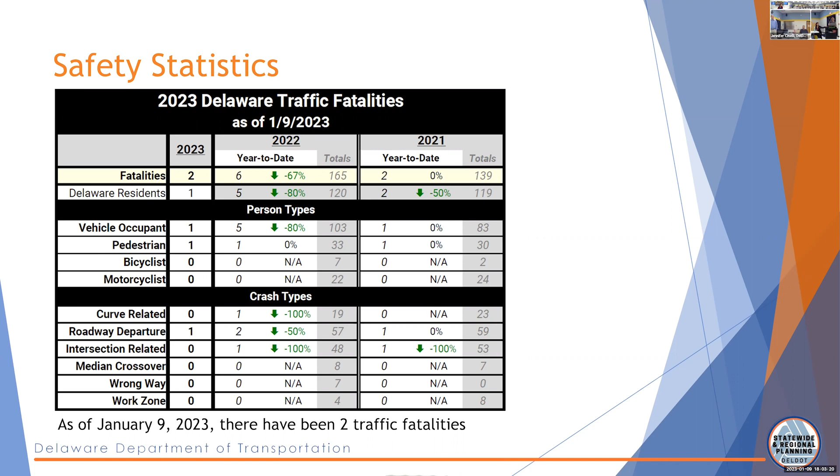I'm going to hand it over. Excellent. Not always the funnest way to start a meeting talking about that, but that's how important it is for us to get that message across. And again, this meeting is a virtual meeting. We are on Zoom, so there are other people listening and not just you all, and we hope to spread that message, not just to you, but to everyone. So thanks for hearing that.

As always, these meetings are designed for the corridor committee members. They are open to the public. We welcome the public to come, whether virtually or in person. However, questions and discussion will be with the committee members. We will have public comment. And I am going to go through the agenda right now because we are doing our public comment a little differently tonight. So you'll see we're going to do our introductions and meeting overview.

We're going to have 2 different presentations. All presentations are important, but these really are going to build into the small group breakout sessions that we're going to do tonight. So at some point, half of you are going to go to one side, half the other. We're going to have a little bit more of a small group discussion. And everything that Steve and Leah talk about in terms of first the existing conditions, and then as we transition to our safety and capacity improvements toolbox, we hope that you'll bring that over to the discussions and provide some good input.

When we decided on the composition of our corridor committee, certainly it was because each of you represents a different group, a different business or institution or advocacy, but it's also because each of you as an individual we thought would be good at contributing.

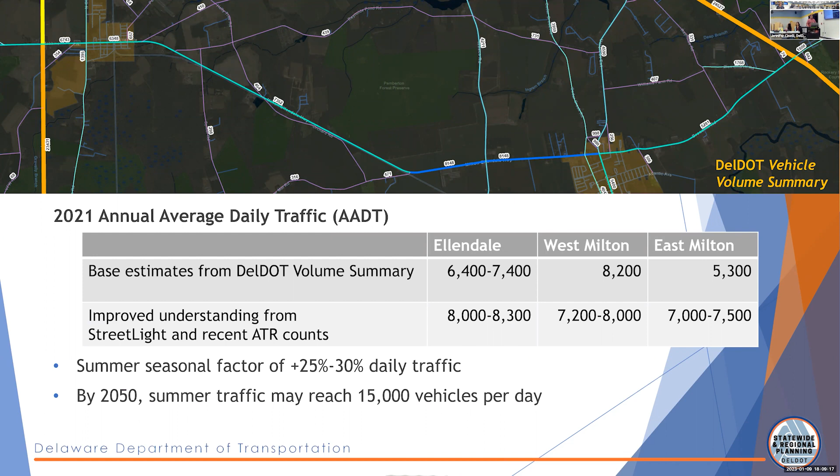So we talked a lot last time about the corridor being sort of a beach route, and that certainly holds up with a little more in-depth analysis. And just to give a perspective, we may be talking about 15,000 vehicles per day by 2050 as this continues to grow. A little bit digging into some of this StreetLight origin-destination data that we think is pretty cool.

Looking at from an origin west of 113 and how the traffic behaves along 16. From west of 113, we're seeing about 60% of through traffic. 60% of the cars tracked go all the way through to SR1. So that sort of confirms 16 as a true through route. These cars are destined to the beach and back, going the other way.

It holds true on the other side of 113. We're not seeing a lot of drop in the track volume, which would imply destinations and stops in Ellendale or even Milton. Some of the volume does leave 16 and head south on Route 30 and Route 5, typically via Route 30, and we see some traffic peel off at Mulberry Street using Cave Neck Road. So some traffic does leave 16 and head to points around Route 9 and all the way down to the Long Neck area.

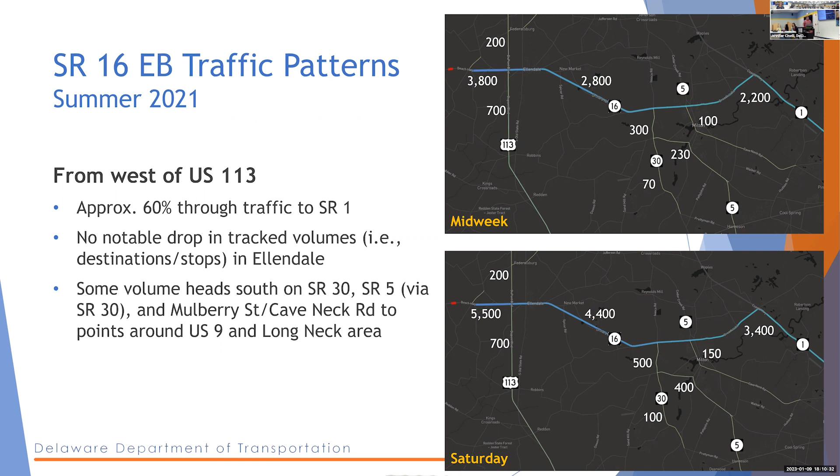Similar from east of Ellendale, and you can see we're tracking more traffic. There's a lot more traffic both midweek and Saturday, and it's critical that Saturday is higher, further supporting the beach route that we're talking about. Still 60% is the number we're seeing as through traffic. The first significant traffic split is at Route 30, where we lose about 17% of the track volume. The most common route from there is actually 30 down to Sand Hill Road and then over SR5. From there, they head to the Route 9 area, or some are tracked all the way to Long Neck.

So a small percentage of traffic is stopping in Milton, whether that's downtown or points along Route 16; they keep continuing, whether that's Long Neck, 9, or Route 1. And again, the reverse is true. We're thinking of a west to east progression, but the percentages and overall numbers are pretty similar looking westbound as well.

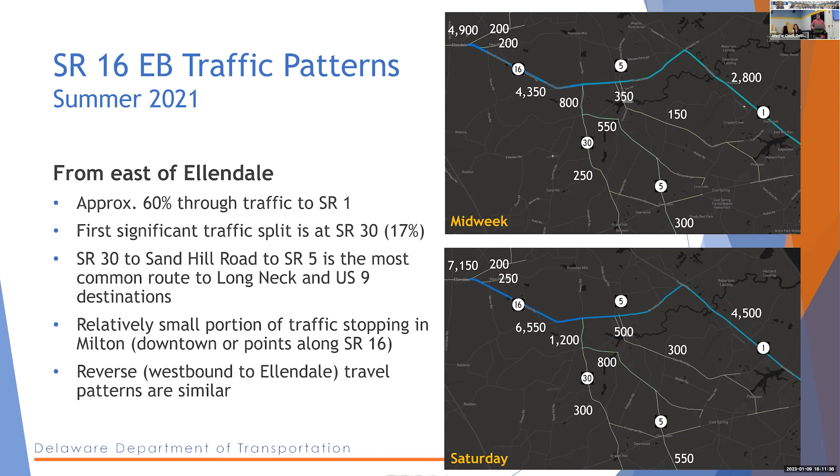Since we did identify Route 30 as a breakpoint and a turnoff point for the traffic that does leave 16, we looked into that a little bit too. On a weekday, you can see it's the best way to move north-south through our study area between Route 1 and Route 113. From the reference point just south of 16, we're seeing cars use 16. Obviously, plenty of cars head up on Route 30 towards Milford. A few head east, and then southbound it splits fairly evenly: 30 south of Route 9 and 5 south of Route 9 both have a pretty significant number of cars tracked from the Milton area.

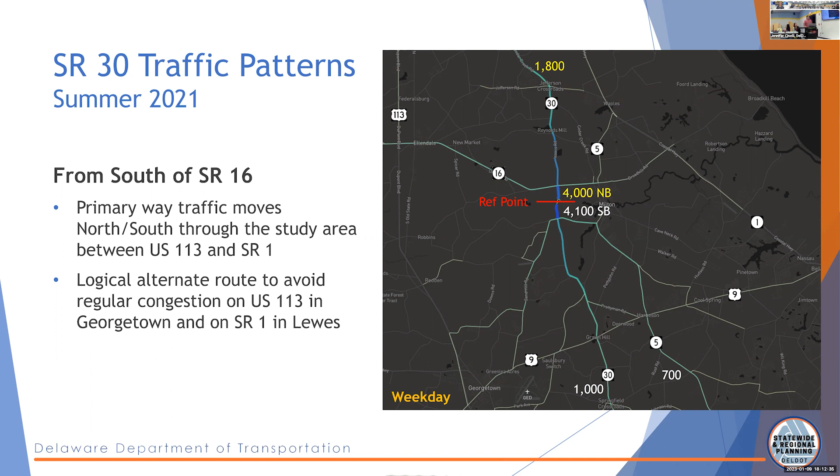So that's a logical alternate route to avoid the regular congestion we see on 113 in Georgetown and Route 1 in Lewes. The difference on Saturday is pretty stark. You have a lot more traffic on 30 on a summer Saturday, especially southbound. We're tracking 7,000 vehicles, which is almost double what we were tracking on a weekday, and just under half of that stays on 30 south of 9, which is really the cut through route all the way down to Millsboro. So it confirms that 30 is now a tertiary beach route, especially on weekends. You have Route 1, you have 113.

And I kind of wish IG Burton was here from when he was councilman. He and I talked endlessly about Route 30 being the new north-south highway through Sussex County, especially with the Bay Health campus. Looking at these numbers, the 4,000, I thought, oh, the Bay Health campus now has AI DuPont on there, that's what the traffic is. But if you look at how much it increases on the weekend, that campus isn't really open. So it's definitely visitors to the area. This is summer traffic we're looking at. It's the worst case, but it shows the growth and patterns pretty clearly.

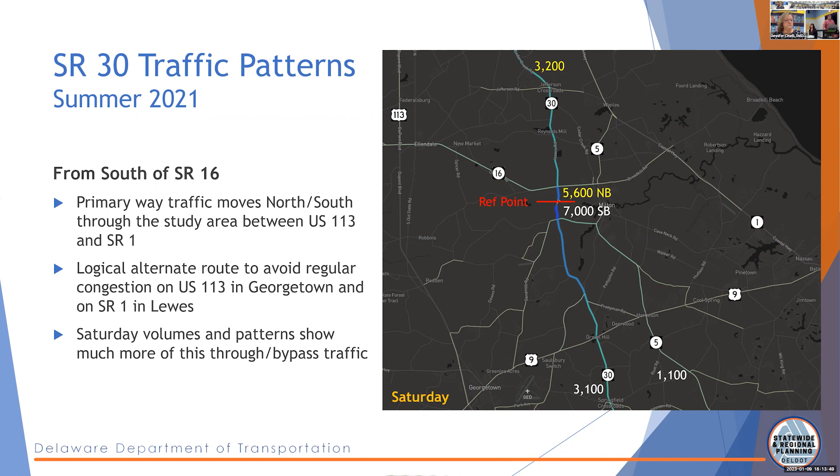All right, so just to summarize quickly, we definitely consider Route 16 one of the northern beach routes, with the typical associated characteristics: high through traffic, higher weekend than weekday volumes, higher summer volumes than off-season volumes, and low local OD traffic in Ellendale and Milton. We learned that the volumes are slightly higher on the west side of the study area, but they're pretty consistent overall. But Ellendale does see that first rush of traffic along 16.

So with the volume we're at, we may be talking about some of these high volume side street intersections that may start needing improvements for safety or operational issues that may be starting to arise or may already be there.

Of the traffic that does not stay on 16, a common route is 30 to Sand Hill Road to SR5 - to points south. We're not seeing that traffic go all the way to Route 1 as a bypass to avoid 16. 16 still moves pretty well and carries a lot of through traffic, but these roads are a common way to get to points in that area. So that's good to know.

And 30 is typically a day-to-day balanced north-south distributor. You can see it's split traffic, a lot of local traffic on Route 30. But in the peak times, like summer Saturdays, we do see a lot more regional throughput.

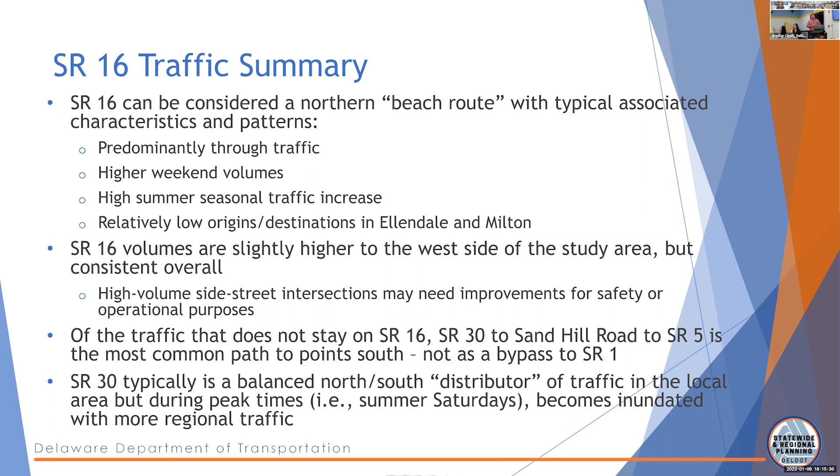So now Leah's gonna talk a little bit, help me out. Thanks, Steve. Yeah, so obviously Steve gave us a really good overview of what's happening now. He did mention, maybe by 2050, we'll see things grow up to an even higher threshold of 15,000 cars a day during summer peak.

So one other thing we want to look at is what's coming, right? There are other developments and DELDOT projects coming along the 16 corridor right now. So we're going to walk you through from west to east what's in the pipeline right now. As we break into small groups, we'll have staff who can fill in more details. You may have questions about some of these projects - I know I do, everyone else in the room probably does too - but I'd encourage you to make note of those. When we break out into small groups, we'll have folks from the county, from state planning, and Steve can speak to some of the DELDOT capital projects.

So starting right at the intersection of 113, I'm sure some of you are aware there is what's called a grade separated intersection coming in at that intersection. It's still in preliminary engineering - DELDOT has not started design on it yet. So this is actually a good opportunity to weigh in on that, because any feedback you provide will go to the DELDOT project engineers. Basically, 113 will go over and 16 will come underneath the roadway.

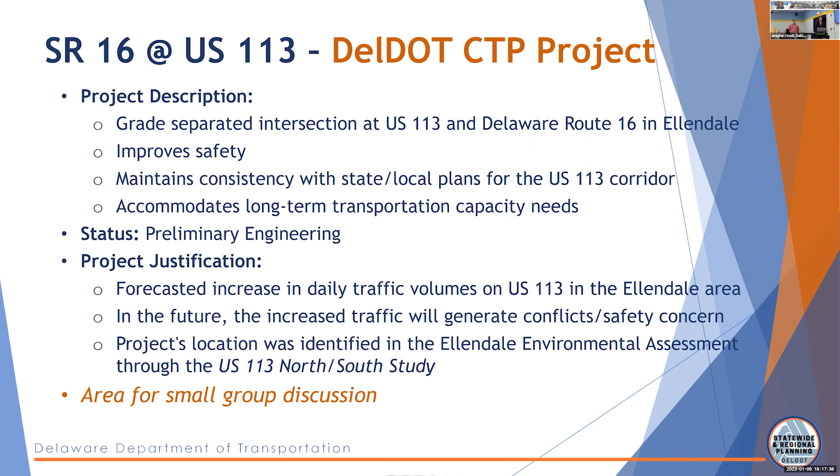Also, we have some development proposals right for that intersection. One, right at the northwest corner, is called the Enclave at Starwood. That project has been submitted to the state and has gone through the PLUS process. Dorothy in the back knows more about that than we could ever ask to know. That development is proposed in what the state calls Level 4, and Level 4 is where the state really only wants to see agricultural or conserved land. It's not a place where the state wants to fund infrastructure investment. So they're in conversations - the developers are in conversations with the state, which is going to provide feedback - but really, per state planning, that's an area where we more want to see those lands conserved without development.

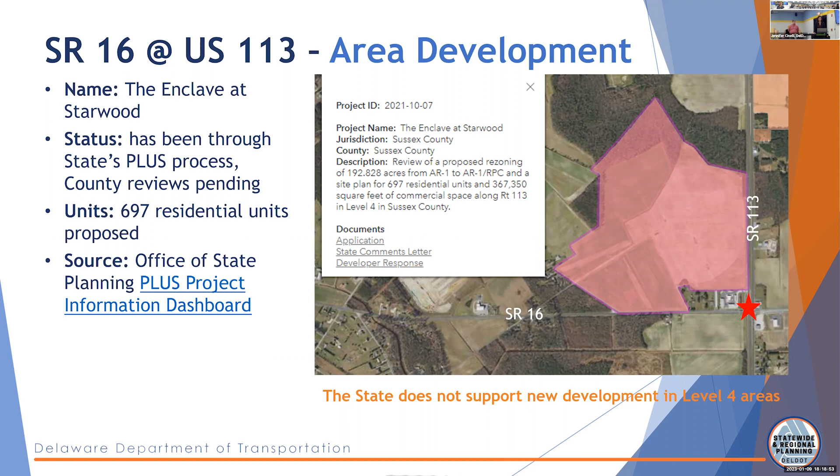But you know, oftentimes developers see that a big grade separated intersection is coming in, and maybe that's an opportunity. So they are seeking annexation into the town of Ellendale, which hopefully will happen within the first six months of the year. Very interesting news, and that is underway - someone else in the room can speak to a more updated situation. So as we continue into the town of Ellendale, we also have a proposed development to the southeast corner.

That is called Newdale Acres. That's another 296 residential units being proposed, and that one is a little bit further along in the process. That subdivision has been approved; they just have not started construction yet. So that one's coming.

Another update: that one has been annexed to Ellendale, and they have started construction in there, so they're going to start construction elsewhere for the next few years. So construction coming soon, and it has been annexed into the town. Thank you for that update. So that's another big impact in that direct area and vicinity.

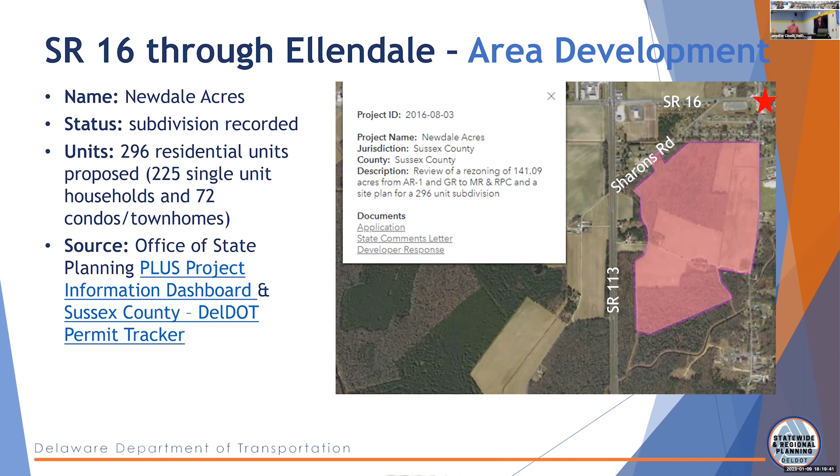Of course, we care about this because this is going to mean more cars on 16, as well as on surrounding roadways.

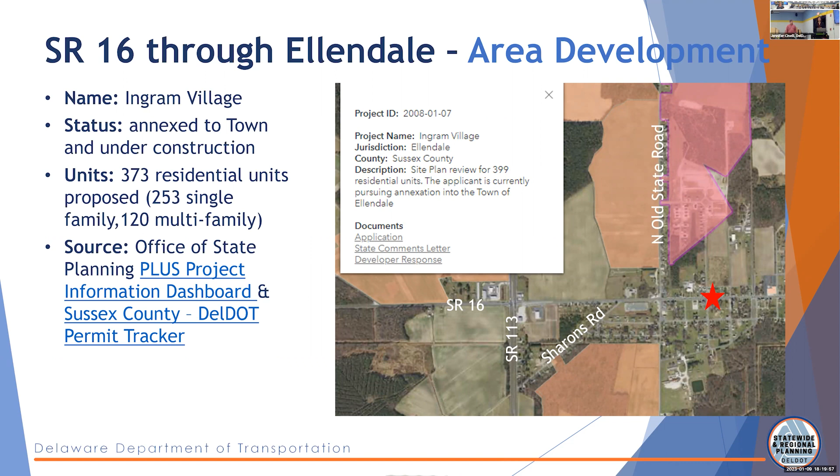Going north of 16, Ingram Village - we know this one has been annexed to the town and is already under construction, so many of you are probably familiar with the new homes going in back there. Total of 373 residential units. And then lastly, right in the vicinity is Garey Farm, which is on the west side of North Old State Road.

That also has been through the process. Do you have any updates on that? They'll be on the same timeline as the Enclave at Starwood - the same timeline as the bigger development to the west. And that's another 491 units.

So I think you all are seeing why we're here tonight - there's a lot of development coming, and we definitely need to start preparing for that growth.

And just to put a punctuation mark on this with Ellendale, what was your census number? So our census number was around 500, and there's actually two developments that aren't going to show up here, but that touch the two developments that are shown. And if everything gets annexed in like it's supposed to, yada yada yada, 5,500.

Right, 5,500 homes, correct? Units. So yeah, it's an interesting mix - it's probably 2,500 to 3,000 houses and 300,000 square feet. But that's almost quadruple the population of Ellendale over the course of maybe 4 or 5 years.

And what we can do for you all - we can touch base and get the information on those other developments you mentioned, and we'll distribute a revised version of this presentation that builds in the information we're hearing tonight, so everyone has it. I just wanted to make sure everybody was clear on what their census number was for 2020 and what it will be in 10 years.

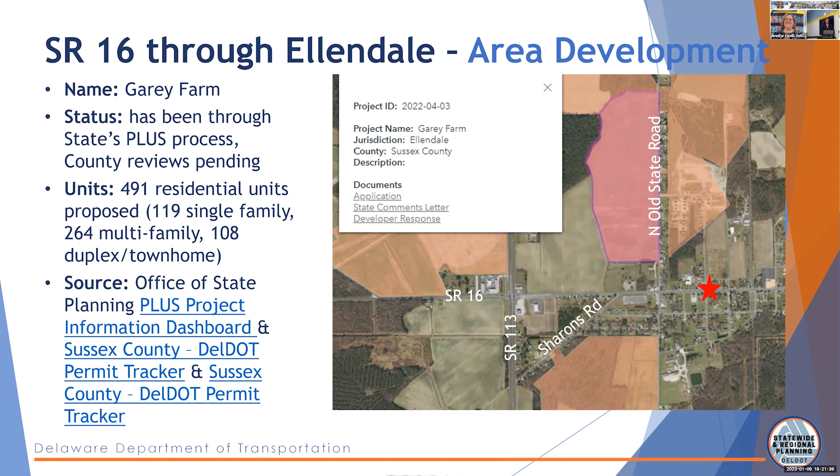So continuing east, we get a little bit more rural in character again as we head towards Milton. But we did want to briefly touch on the intersection of 30. As Steve said, this is a primary north-south route, and the intersection right now is pretty straightforward and basic. Steve, if you could walk through these two diagrams on the screen for us - I know you probably can't read the numbers on screen, but you can on your handout if you want to take a look.

Yeah, so this one didn't show up on our counts or models or even INRIX much as a huge problem, but we did get a comment at the first meeting. There's some frustrations here - Jen has shared her local knowledge that there's a lot of trucks. There's just, because the intersection is only one lane on each approach, there's a lot of waiting and yielding and problems queuing and stuff like that.

So what does show up on INRIX a little bit is that less than half the cars that go through this intersection on a typical midday in the summer get through on green. So more than half the people are stopping here. Maybe that's an issue or it's balanced - maybe this runs free. There's some issues we could look into there, but we're starting to see, just from anecdotal evidence and some of this deeper big data, that there are some needs here.

This was also identified in a 2017 HEP hazard elimination program as a safety issue. So after a study there and some analysis from that federal program, it's currently proposed in the CTP as a roundabout to be installed there, which would improve the safety issues. Right now, it's planned for construction in 2025.

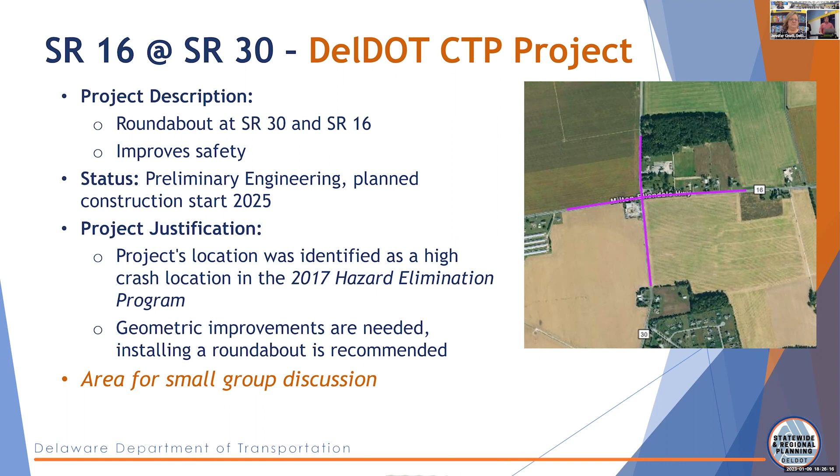Continuing, also at that corner of 30 and 16, we have Milton Village being proposed, which is another very large development. They've started it, and there's another one just to the east. It's under construction already.

I think there's a small portion of this. Part of the site might be the fuller residential development, but the commercial piece is... just to the east of that, Jack Lingo has a listing for another 60 acres, one of the parcels up to Shipbuilders.

So you see that little cutout for the house? It's going to be everything to the east of that house property. Am I right on that, Jeff? Yeah, that's what I thought. I thought that as well.

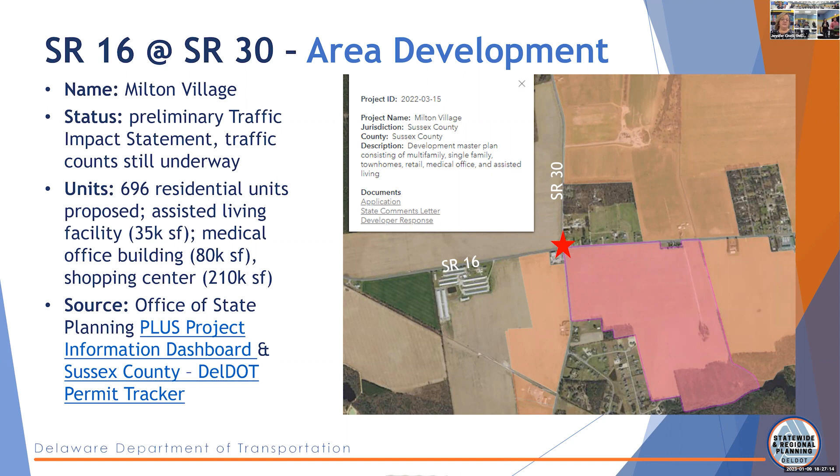And then also to the south, so where 16 is, not on this map here, this is down below, a little further south, below Sand Hill Road on 30, there's also a very major development coming into Granary. And that's the largest development we've talked about tonight, over 1,300 units plus a shopping center.

So again, as part of the review process for this, we know the intersection of 30 and 16 is going to be addressed with offsite improvements potentially. And they are annexing into the town of Milton, they have already. You have 697 started just to the west of that on Route 30 and Shingle. Oh, that's the other development that came in a couple years ago, right?

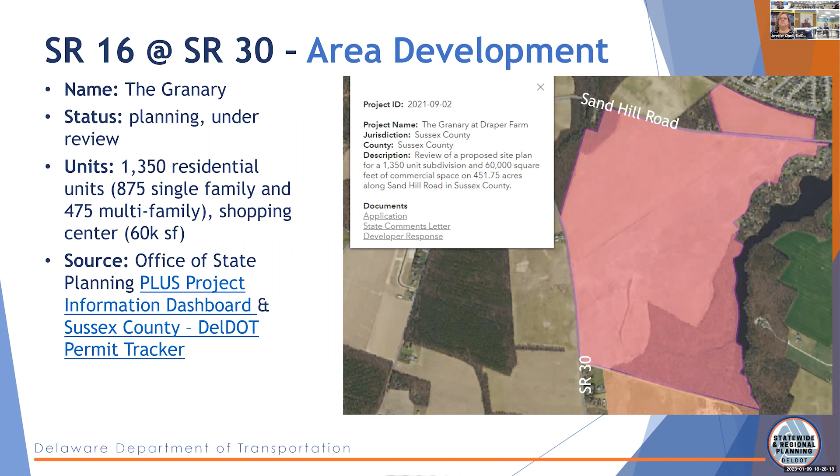They have not annexed. They have not completed annexation. Did they express intent? Okay, yep, this is good discussion that we want to have. We want to have most of it during the small group, but that's good. No, thank you all for sharing this.

Your local knowledge. So moving a little further east to Route 16 at 5, another intersection that we know needs some attention. Let's show the contrast in the data, where we're starting to see similar issues showing up, where all approaches are sort of locked up with one lane. People are getting stuck behind trucks, each other, left turns, anything.

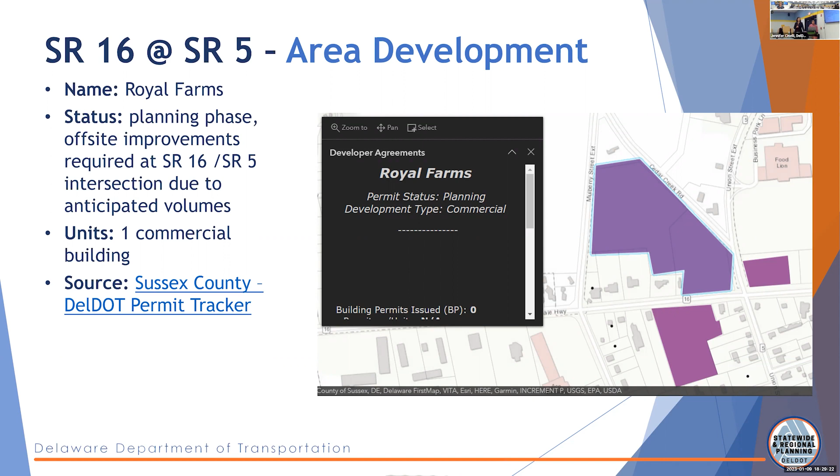And also, less people get through on green without stopping. A Royal Farms development is proposed at the northwest corner of that intersection, currently going through the DelDOT review process. So no updates yet on how that will play out as far as any offsite improvements they'll be required to make. But we do know that is a consideration both at Route 5 and also on Mulberry Street to the west, which has also been problematic and will be impacted by the Granary development. That's all areas we want to discuss in our small groups.

And I think most of you know this, but just to make our way all the way over to SR1 — obviously barrels are on the ground right now, we drove through it on our way here — the grade separated intersection at 16. So here is a rendering of that.

Again, this is similar to what would bookend our project over at 113 once that is designed. You can see Route 1 passing over 16 there. I know I've talked to some of you about concerns about how this will impact downstream traffic and crossings, so there was an analysis done to speak to that. We can get into that if anyone has questions once we break up.

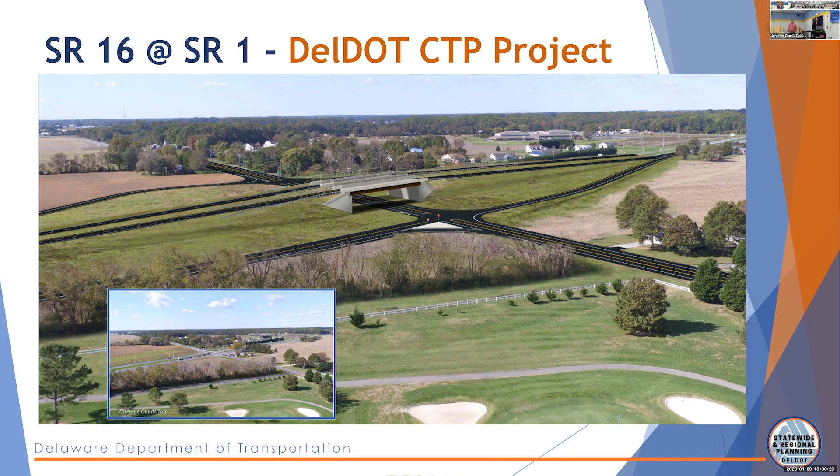But we're going to transition now. Thank you all for the great feedback about projects. I encourage you to shoot myself an email, because we can assemble all the new information we heard from you and distribute that to the group so everyone has it. But now we're going to get into what we can do about all this.

I think we all know that 16 can't remain the way it is now and accommodate all of this growth and allow people to safely and efficiently move through the area. So we're going to talk about three different categories of improvements we can entertain: one's at the network level, kind of big picture, how people move through the entire area; one's at the roadway level; and one's at the intersection level. We're going to walk through that.

And we're calling it safety and capacity because those are really our two goals here. I want to highlight one clause from the DelDOT mission statement: every trip. We strive to make every trip taken in Delaware safe — that's first and foremost. We want people to be able to get to where they're going safely, and reliable and convenient. That reliability and convenience really speaks to why we care about capacity improvements, to make sure folks can leave their driveway and get to where they're going in a timely fashion.

So I assume a number of you are familiar with the 5 Points working group process that's been going on. Glenn, I know you serve on that body as well — thank you, it's been years. And we're kicking this off a little bit further ahead than we did with 5 Points. 5 Points was kind of reacting to things failing. We're still ahead of the game a little bit with this group.

But one thing we did with 5 Points was classify our types of improvements according to how much they're going to cost, how much time they'll take to get on the ground, and how much impact they'll have. So as we go through our toolbox of ideas, we'll have classifications next to each one. Some of them will take a lot of money and time and have a lot of impact, but there are other improvements that can be quick and get on the ground quickly with relatively little pain to surrounding properties and less cost, which is a win-win.

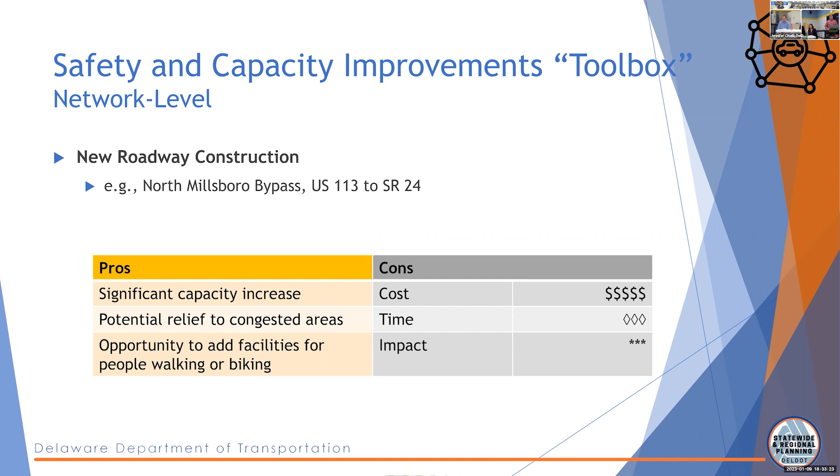Obviously, we could build a whole new road, right? That would be the most capacity gain, a whole new roadway from 0, right? We're doing that for the North Millsboro bypass, for example, down in Millsboro. But obviously that takes a lot of money, time, and it's a huge impact to environment, properties, everything. So use that sparingly, but it's something that we can consider.

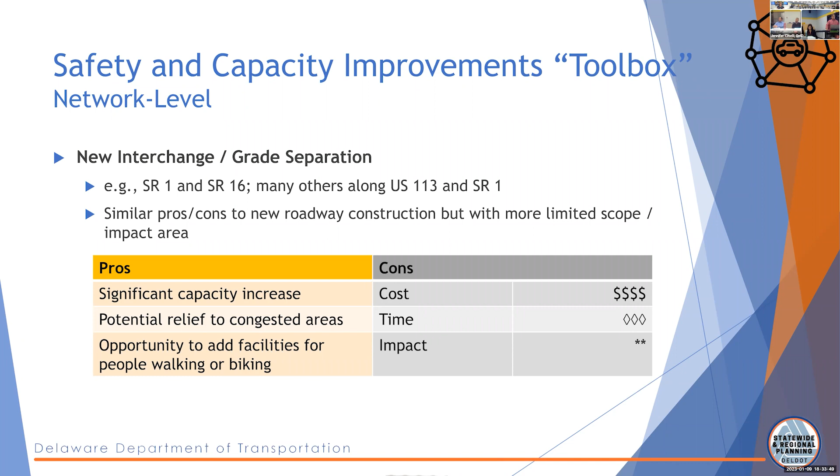Similar, but a little more localized. Obviously, GSI projects are all the rage on 113 and Route 1 right now. So you consider where a grade separation may be useful. It's not, again, not cheap, not impactful either, and it takes time, but it's a little more limited than building a whole new road.

We can realign a road, from more significant, like the Park Avenue relocation underway. That's sort of almost building a new road. Look at it as a new road / realignment, or small scale where we took a bad intersection that was skewed at Airport Road and Sand Hill Road, Route 9, and just sort of realigned it to really improve operation, safety, capacity, give us some more options there. So this sort of depends, but there are a lot of things you can gain with those.

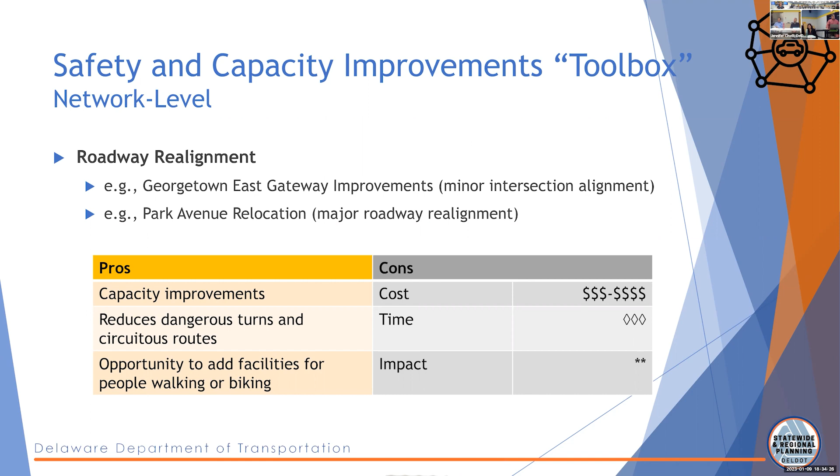And then one thing we wanted to talk about that's typically more on the developer, but since we have so many developer projects, we want to make sure that we're keeping interconnectivity of parcels and towns and the existing roadway network. So when developers come in, they obviously fund the roads in their parcel. To save money, they may only propose 1 or 2 points of access to the network. We want to make sure that we're connecting the roads that need to be connected, that make sense to be connected for both vehicles and bikes, all the other modes of travel.

It also helps out with other pinch points, because it gives you some alternate routes. It gives emergency response more access to the town and to the parcel. And like I mentioned, biking and walking is improved.

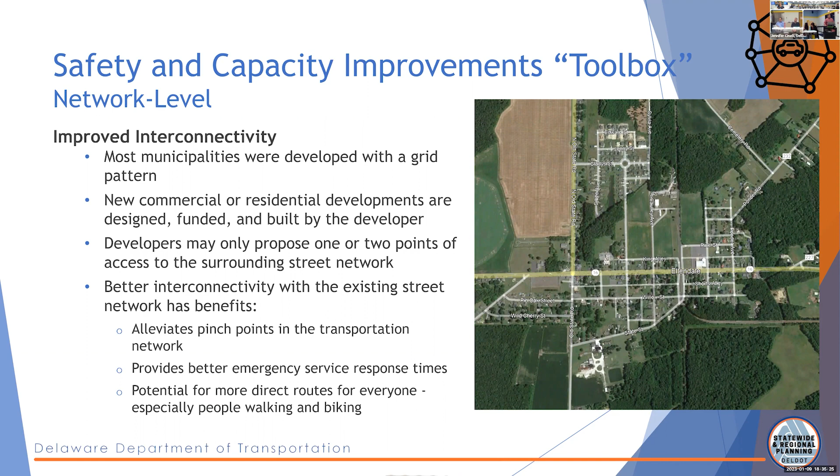So focusing into things you can sort of do on the existing roadway alignment. Obviously you can widen the road. One of the things we'll talk about more probably on Route 9, but going on, we're widening 24 right now. We're widening Route 9 to a point right now, in the Lewes and Rehoboth area.

So typically when we reach full capacity at a lot of intersections, when we sort of run out of improvements to make, turn lanes to add, it doesn't make sense to keep sort of putting band-aids on the problem intersection by intersection. It may make sense to look at a widening approach where you go from 2 lanes to 4 lanes.

Could you put that in context, though, Steve? So right now 16 is 2 lanes. Yeah. And we're talking about maybe eventual volumes of 15,000 by 2050. Would that be a 4-lane road, or is that? That's what we talked a lot about at that last meeting. That 15,000 is sort of borderline. We presented 20,000 as the level last week where we sort of expect to need to go 4 lanes.

But a lot of that depends on the side streets and how much traffic's crossing your busy 15,000 ADT road, right? So as we focus on intersections and as some of these side streets grow and need signals or need roundabouts, we just have to take a holistic look at the road and see if it makes more sense to treat it intersection by intersection, or if there's a desire to widen.

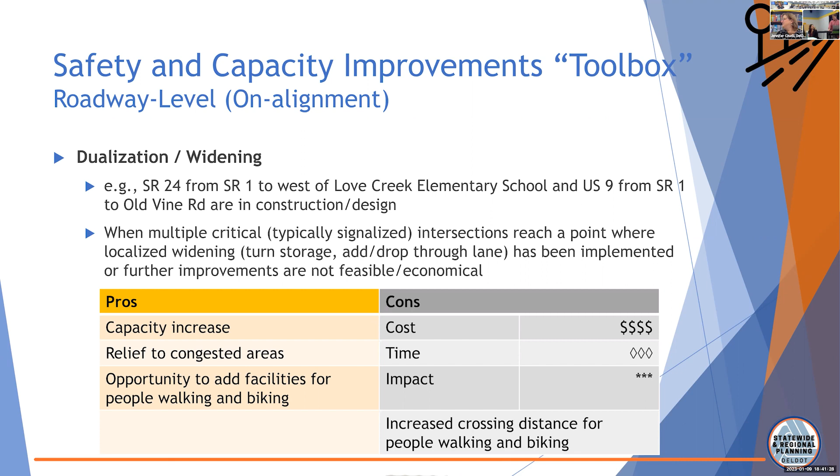So, yes, worst case scenario, we try to be as conservative as possible when we're estimating these numbers, but it's a fine line because who knows what the economy is going to do in the future. Because again, we were looking at this exact scenario 15 years ago and it never materialized. It's a hard game to play. None of us have a crystal ball. I was saying they're all going to go in, there's a lot. Yes, definitely going in. Shovels are in the ground. Yes.

Another thing, short of full widening, we can add a two-way left turn lane or center turn lane. Doing that in the area of 24 at 5/23, sort of west of where we fully widened. There's more of this going in, which separates the left turn traffic, especially in an area where there's a lot of commercial access to driveways. It can be beneficial to keep the through lanes moving.

Downsides, obviously, is some people call these, you know, suicide lanes. What do you call them, Jen? That's what I call it. Yes. So there may be some safety concerns if they're not done properly. And there's been comments that people who travel to this area, maybe not coming from somewhere where they have these, don't know how to utilize these.

And I know there's one on 14, I call it, but Front Street in Milford, right at the BP station where the shopping center is, where if you're not careful, somebody coming to turn into the BP gas station and somebody trying to turn into the shopping center are going to crash into each other. So you got to make sure the alignments are done correctly, right? So yeah, it's got to be done smart. Yeah.

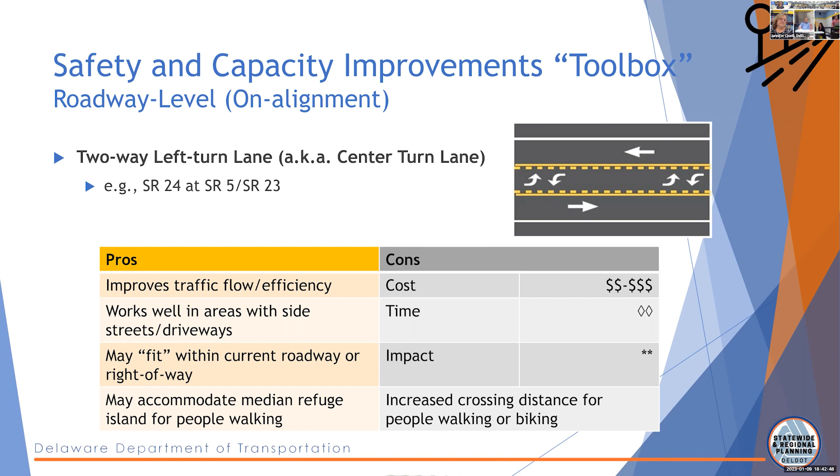Adding a frontage or service road. A lot of the SR1 interchange projects are including these to maintain access to parcels. So this is a way to combine a bunch of access points along a frontage road to then access the major route.

One of the biggest ones in the area, most of you would probably recognize, are just after you go over the Bay Bridge. You get off for Wawa or McDonald's. Those are service roads that were built in by Maryland DOT for those businesses, for the people to keep going on 50, while everybody that needs to peel off is able to do so safely. So that's what a service road would look like.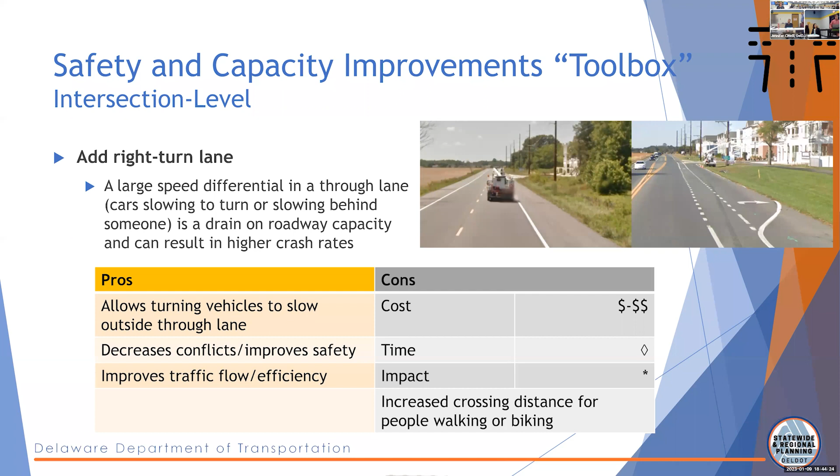So as soon as you build that turn lane, you can decelerate in the turn lane, and you can maintain good flow. If you consistently provide that, you maintain good through flow in the one lane. Same thing with left turn lanes, maybe even more dangerous when people are waiting, yielding to oncoming traffic to turn left at an uncontrolled intersection. You might have somebody get rear-ended, somebody that moved out of the way at the last second, the car behind them can't see. So we see a lot of what I call sitting duck rear end crashes. Also provides some marked benefits to right turns.

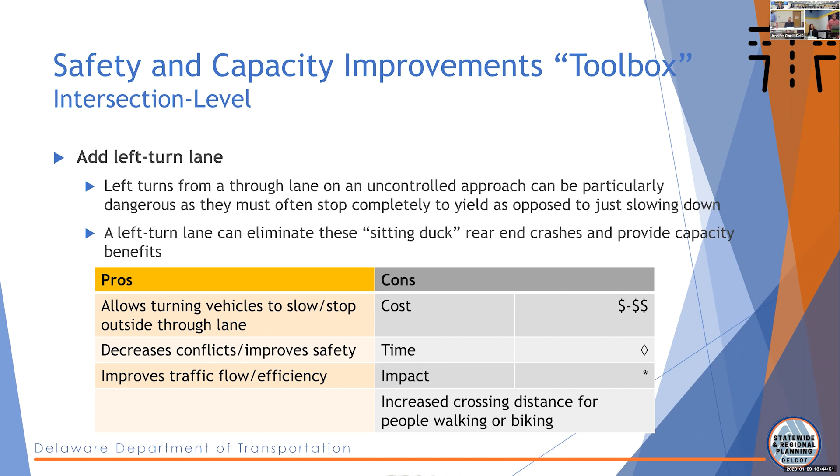All-way stop control. Something DelDOT's had a fair amount of success with statewide with safety benefits. There are specific volume and crash warrants provided in the MUTCD, so you can't just put these in anywhere. And they're not meant to be used as a speed control measure. That's specifically stated, and we get questions about that a fair amount. But where they've been used appropriately, they've been shown to provide significant safety benefits.

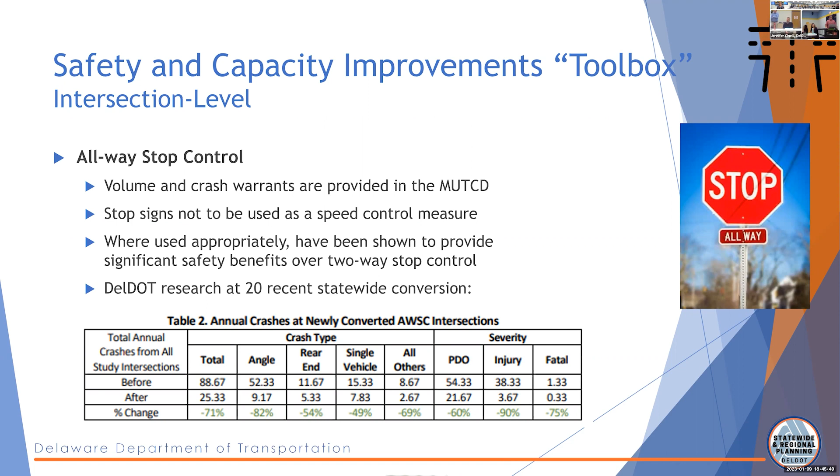This is a table from a recent study of 20 recently converted stop controls, a basic before-after analysis. We've reduced crashes 71%, severe injury crashes 90%. Those are incredible numbers. A pretty good sample of all-way stop control conversions from two-way stop control, uncontrolled on the major approach. Now we're stopping all that traffic, making sure everyone can see and moving at a slower rate. Real benefits there. Pretty quick and easy to do that.

Roundabout, great tool. The state is becoming more and more familiar and comfortable with them. These diagrams are from Federal Highway, but they show all the conflict points, vehicle and pedestrian, you can experience at a standard 2-lane 4-way intersection. You have left turns, throughs, crossing all sorts of paths, lots of ped conflicts. You make everyone turn right at a roundabout, you really minimize the conflict points and the severity of the conflicts. They go from angle to sideswipe type crashes.

You also keep people moving, so you get a higher throughput than a typical all-way stop intersection. With proper design, they can lower speeds as well, as you deflect traffic into the roundabout circulating road. Obviously, they require a lot of space, but we've been successful with some implementations of compact roundabouts or even mini roundabouts in places. A little more planning time to implement, and a little more impact in construction.

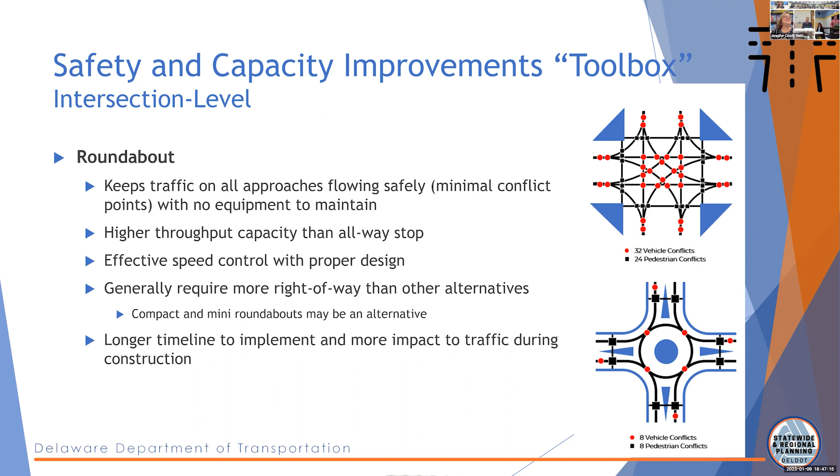Unless the incoming development builds it, as they did on New Road, right? So the Groom property, I forget the name of the development now, but on New Road where the roundabout exists now, that was actually built by the developer as part of that neighborhood for us. So they can build them faster than we can.

Yeah, this one along Sand Hill Road. I'm not sure if that was part of the GG project or the developer. I know there's a big developer project, Westlake, there too. So I forget. But yeah, they're popping up throughout the county and throughout the state.

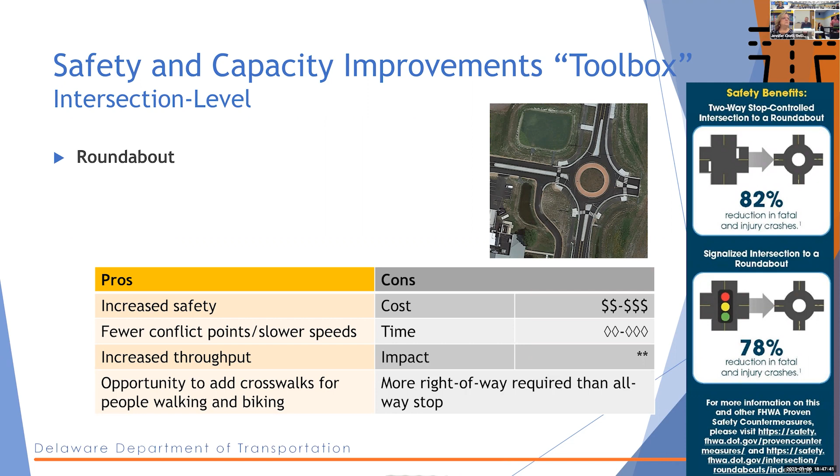Obviously, signalization's always an option. Don't probably need to explain that too much. People understand signals. One thing we say about them is we can reduce the angle and the injury crashes a lot of times where we have severe crash problems, T-bone angle crash problems, but they do often increase rear end crashes and the less severe property damage crashes. So there's a little bit of a trade-off there.

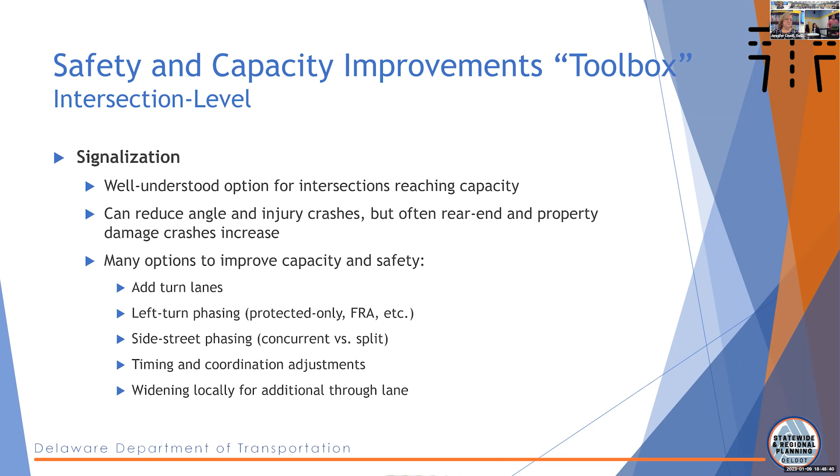But installing a signal allows us a whole mini signal toolbox of things we can do, from adding turn lanes in the signal to changing the phasing of the left turns, whether that's protected only or giving you a flashing red arrow. You can change the side street phasing if you need. If they can go at the same time without hitting each other, that's great. That improves capacity. But if it's a safety issue, you can split, so one side goes and then the other. Signal timing adjustments, coordination adjustments with other signals, and obviously widening comes into play here too. The pros and cons there.